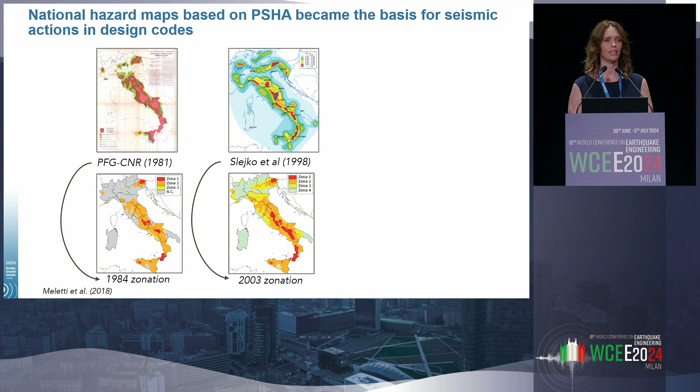Then in the late 90s, there was another working group that worked together to produce a probabilistic seismic hazard model. This did not actually ever find its way into a seismic design code, but it was included in this non-compulsory prescription after the 2002 Molise earthquake. And for the first time, there was a zonation map where every single place in Italy was considered to be a seismic zone. And so modern capacity design principles, ductile buildings, had to be designed everywhere in Italy.

And then we come to what's known as the MPS-04 model. So this is the seismic hazard model from 2004. At least 2004 was when the first results of that model were released, a PGA map with a 10% probability of exceedance in 50 years. And then over the subsequent years, a number of other outputs of that model were released, spectral ordinates for different return periods. And these were included after the L'Aquila earthquake, finally, into the seismic design code in 2009.

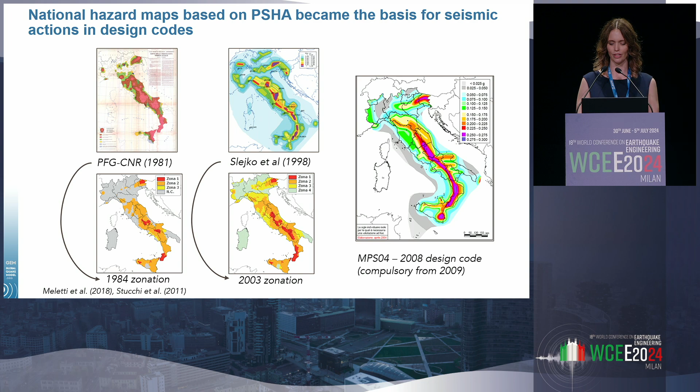Just to show you briefly how this MPS-04 model is used in the code. So we have a grid of points over the whole country. I think there's between 10 and 15,000 points. And at each point, a uniform hazard spectrum has been computed from the PSHA model for a number of return periods. And then what is found in the code is the PGA, a spectral amplification factor, and then a corner period. And those three factors have been defined by trying to best fit a spectral shape to the uniform hazard spectra. So they vary across the country and with return period.

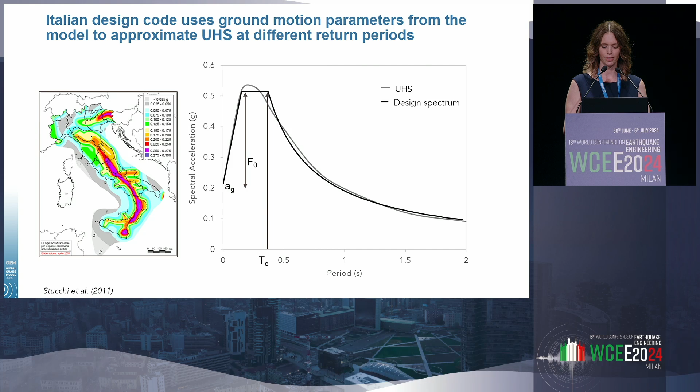So where are we today? It's been 20 years since the first results of MPS-04 were released. Well, we have had an update to the seismic hazard model in Italy since then. It's known as MPS-19. But unfortunately, this model has not yet been approved for adoption in the seismic design codes in Italy. And it's a long story, and I think there are people here that are probably much better placed to describe exactly why that isn't the case than me. But I did want to focus on one key aspect which I think has been a problem and from which we can learn in the future.

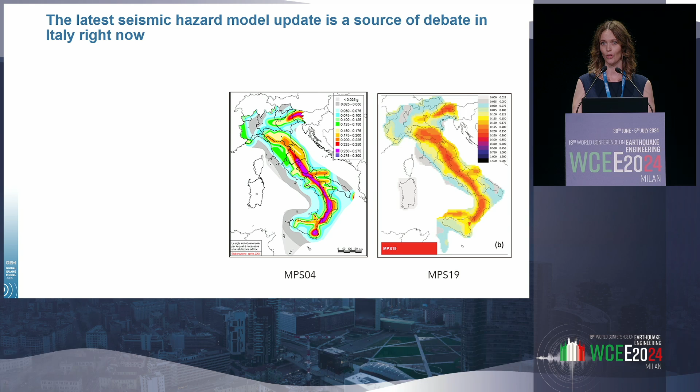So this model went through a number of reviews, international review panels, but there was one review in particular by the Civil Protection Department, which, when they were reviewing the model and seeing how much it had changed some of the values of PGA with the 475-year return period with respect to MPS-04, there was concern. And so there were requests to make some adaptations to the underlying PSHA model, to get, in their words, outcomes that were deemed more suitable for engineering applications. And so the PIs of that MPS-19 model, Marzocchi and Meletti, have responded with a paper in Seismological Research Letters, explaining that PSHA deals with what it is, not what we want it to be.

And so what they're trying to explain in that paper is that a PSHA model should be considered the best of the available science that we know today, earthquake science, and we should not be adapting that model to get the results that we want for our engineering applications. Now, they refer to this as the hazard risk separation principle, and that it's been violated because hazard modeling should be kept separate from then how that hazard model is going to be used for decision making.

I'm not a big fan of that term, the hazard risk separation principle, and I think you'll see from my presentation that I really want the hazard and the engineers and the risk communities to work closely together. But I do understand that we should not be changing the hazard models to get the results that we want.

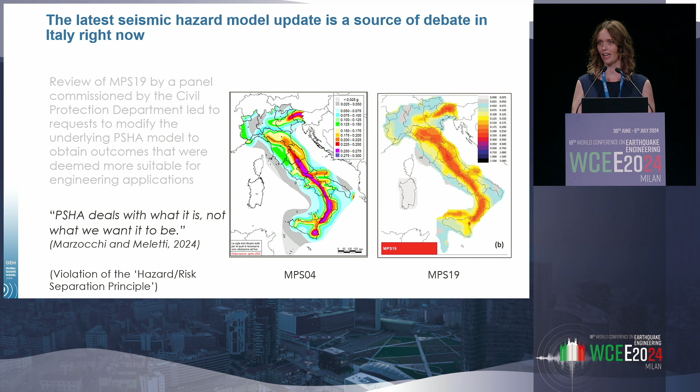One perhaps unfortunate outcome of this debate and this lack of approval of the model is that it's reignited a somewhat old debate in Italy on whether PSHA is actually an appropriate method to be used for defining our seismic actions in the code. And so this takes me on to this second part of the talk, where I want to talk about some of those criticisms which PSHA has received, especially from what's often known as the deterministic seismic hazard assessment community. These criticisms come from, therefore, other earthquake scientists, but also from the engineers and from media.

But let's look at some of the examples of criticism that you find when you read many of these papers, or also that comes through the media or from engineers. So we hear that earthquakes have occurred in a low hazard area. So this is an example of a paper, I've focused obviously on this example for Italy, where the authors, I don't think you can read the text at the bottom here, but they say here that these successive Italian hazard maps forecast some earthquake locations well and others poorly. So they have put the locations of earthquakes on the hazard map and have said, well, some of these locations are in low hazard areas, so that's a poor forecasting of the earthquakes.

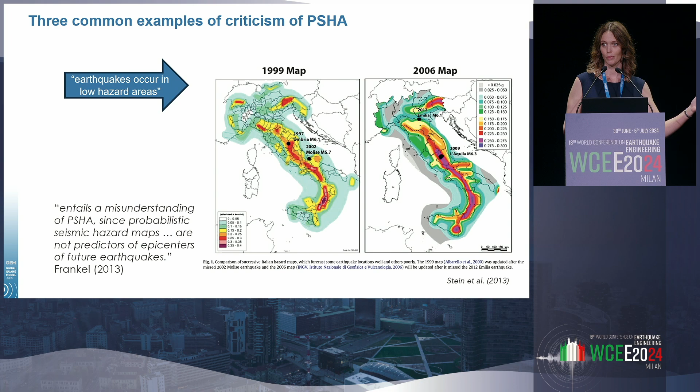Another thing that happens quite often is when the shaking is seen to exceed at some locations the spectrum, and then there's papers and comments that the code has somehow failed. So this is an example of a comparison of some response spectra from recordings in L'Aquila and how they compared with the code. And back at the time, myself and some colleagues, we tried to explain in papers why this was not a valid comparison and why you could not invalidate a uniform hazard spectrum just from single recordings.

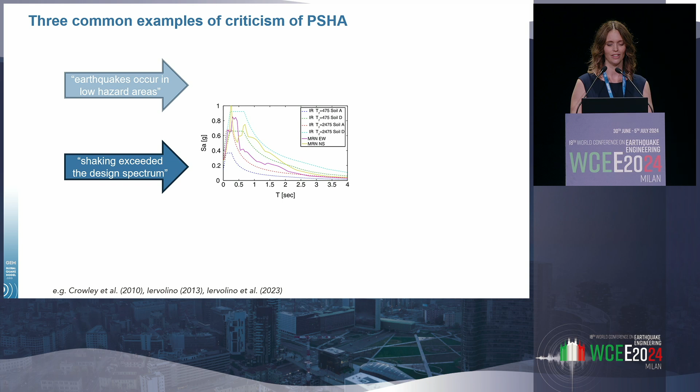Also, Julian has also published, I put the links there, a number of papers to really try and explain very well why we can't do this comparison, and then state that the code has somehow failed.

Apart from the fact that the UHS is an envelope of spectra, and so we're really comparing apples and pears. But remember that we said earlier that we have targeted a certain probability of exceedance, perhaps 10% probability of exceedance in 50 years. So we expect our uniform hazard spectra to be exceeded. The problem is if it's being exceeded too frequently.

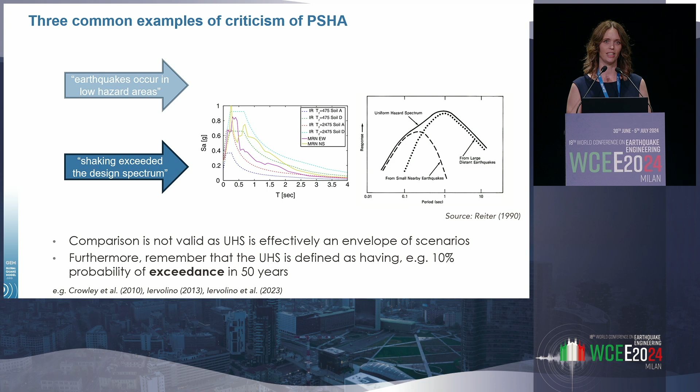And so in those papers that I cite there, there's a discussion of how we could start to evaluate the hazard maps. Now that we have a lot more ground motion recordings and data, we could start to see if we are exceeding more frequently than expected the uniform hazard spectra. But we certainly can't take a single event and a single location and start to criticize the spectra.

And finally, it's been also mentioned in the media, when a seemingly modern building has collapsed, that this is a sign that the hazard underlying the code has failed. And instead, as far as I'm aware, and when I'm giving this lecture, I'm inviting people to also give me examples if they exist, but as far as I'm aware, we don't have examples of modern, ductile buildings that have been designed with capacity design to the latest code that have collapsed due to earthquakes.

Those that have collapsed, for example, in Turkey last year, it's been shown to be due to deficiencies, either in not properly applying the code or in the way that the buildings were then constructed, not following the right practices. So we know that design codes allow us to have a lot of redundancy and conservatism in our design. As we heard earlier, we have capacity design. We make sure that our beams are failing before the columns in the buildings. We're going to stop these catastrophic failure mechanisms from occurring.

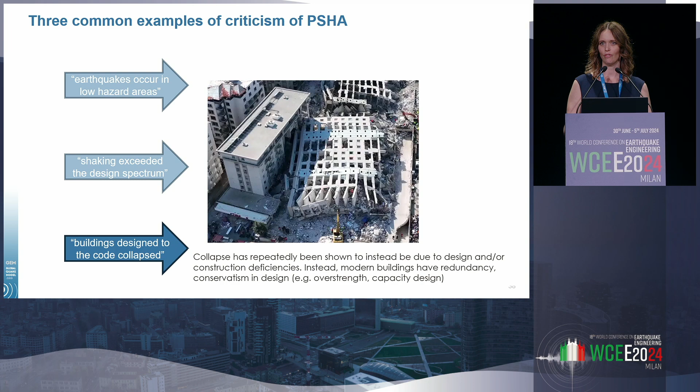And so seeing a modern building that has collapsed, as we can see here, we certainly cannot be then claiming that this is a failure of the PSHA model underlying the code. But while I was preparing the presentation, I was thinking, well, is there a reason that perhaps engineers could criticize a bit the PSHA community? And maybe the fact that hazard estimates do seem to have increased over time can certainly cause headaches for engineers who have to account for this adaptation in seismic actions.

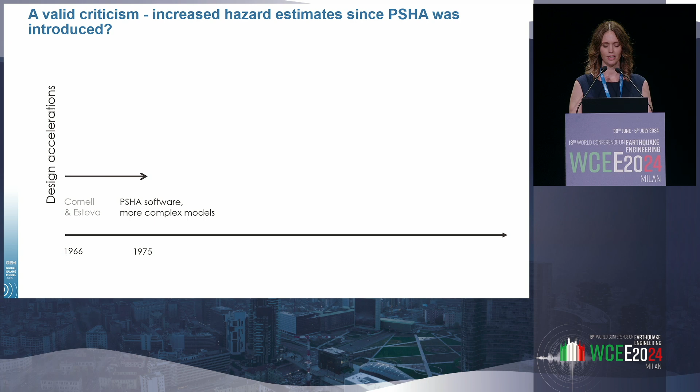So if we go back to the early years of PSHA, I think probably we were not seeing so many big changes in the outcomes of the PSHA analyses. But as is well described in this paper by Bommer and Abrahamson, around the 90s, you did start to see an upward shift in the outputs of our hazard analyses. And this was because it became much more standard practice to include the sigma, the aleatory variability, in the ground motion model. And I don't have an image here, but you can imagine a hazard curve. What the sigma will do is that it will lead to larger values of ground shaking at larger return periods.

What then happened over time is that we continued to collect more and more data. Somewhat paradoxically, this then led to an increase in the sigma in those ground motion models. You would imagine that it would decrease with more data, but it turned out that those early ground motion models, because they were based on limited data sets, were really undersampling this scatter in the residuals.

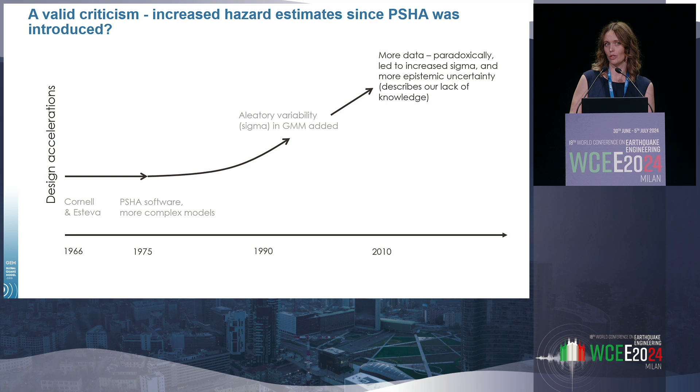Instead, when this study was repeated over 20 years later, with a lot more data that became available, the modelers realized with that additional data, they didn't actually know as much as they thought they'd known. And so they increased much more their epistemic uncertainty. Now, the impact of that increased epistemic uncertainty doesn't change so much the median.

So I've been asking myself and asking colleagues, and I asked this when I presented the lecture, what might we expect going forward? I would like to think that with more data, we could actually reduce the epistemic uncertainty, but a lot of seismic hazard modelers have told me that no, you can expect the epistemic uncertainty to continue to increase. We still haven't really got to the place where we have a stable handle of all the different sources of epistemic uncertainty and how we're modeling them.

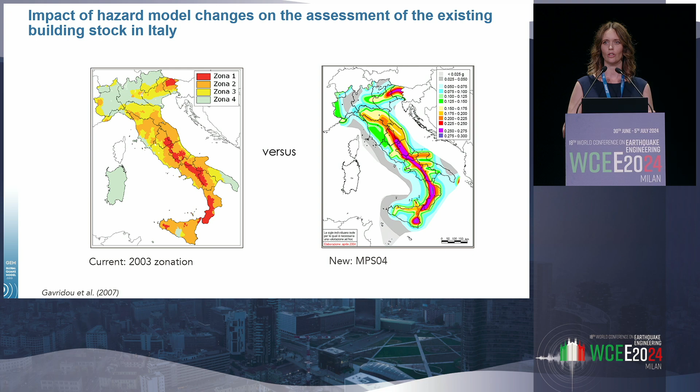So back in 2007, whilst the Italian MPS-04 hazard model was being developed, we had those first results in 2004, but then more and more uniform hazard spectra were being developed. We wanted to look at what the impact of that new model could be to the assessment of existing building stock in Italy. So we were comparing the practice of applying just those 4 different zones, each with a different PGA value and a fixed spectral shape, with introducing the MPS-04 code, which had a much higher grid of values and where the uniform hazard spectrum changed with return period.

So we took a number of reinforced concrete buildings, we applied the code, we applied a nonlinear static procedure, and we placed those buildings across the country, and we saw how many of them would be non-compliant. We brought in also the census data to look at the number of reinforced concrete buildings across the country. So based on that 2003 simple zonation, we were estimating around 40% of the reinforced concrete buildings would not be compliant. Instead, with the MPS-04 model, this reduced significantly to around 16% of buildings being non-compliant.

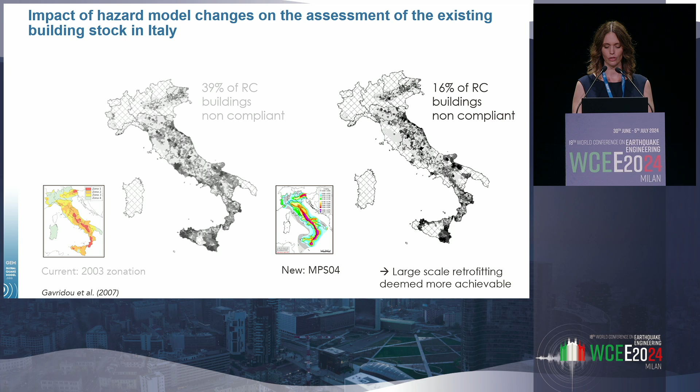And this was an interesting conclusion because it seemed to suggest that large-scale retrofitting would be much more achievable should this new hazard model be introduced. And a lot of buildings have been retrofitted since then. There's also been a lot of buildings that have been designed to that code, to that MPS-04 seismic hazard.

And I think that potentially the review panel I mentioned earlier, they might have worried about what would be the implications of now introducing the MPS-19, given that we've only just designed or retrofitted buildings to MPS-04. And what we've done is tried to look at what the implications of that would be within a risk space. So we assumed that all of our buildings have been designed or retrofitted with the MPS-04 hazard model. Then we produced models of designs for those buildings.

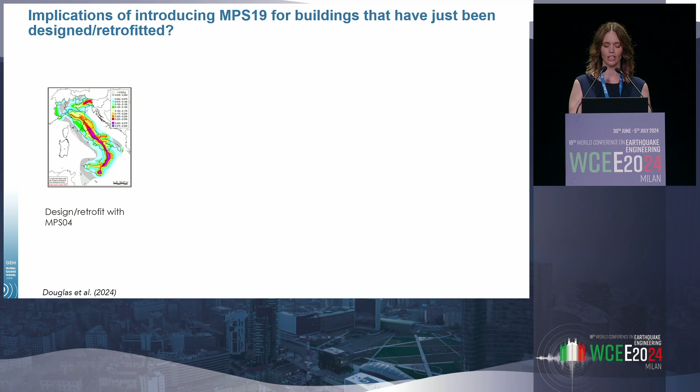So I'm not saying that this is what the outcome should be, but one of the outcomes you could take from this is that you could continue to design to MPS-04 because it implies an acceptable risk still. So should we change the seismic actions? And I think what I'm trying to say is that you need to do these types of analyses. You need to look at it within the risk outputs to really make those decisions. And you can't just look at the hazard results and criticize the hazard and try and change the hazard model.

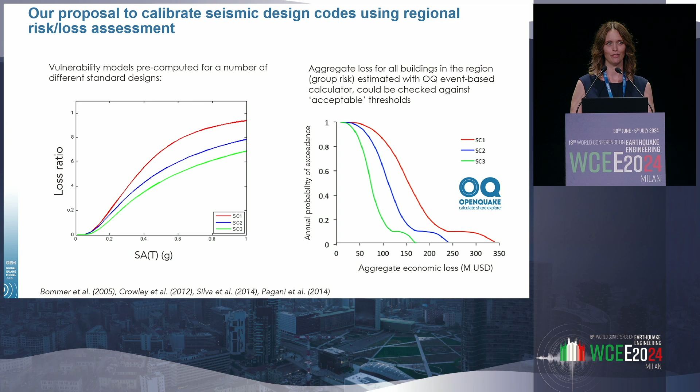They were leading to losses that were unacceptable. But I think we realized quite quickly that this was probably too extreme, probably too radical to completely remove seismic hazard from the code. And when I went to USGS around that time, I spoke to Nico Luco in his office, and he was telling me about what they were doing in the US. And that was, I felt, much more practical.

Whilst they were not considering the group risk, the impact to all buildings in a region, and they were still considering buildings as individuals, they had a much more practical way to bring in risk into the calibration of the codes. And many of you will probably be familiar with the risk-targeted seismic design maps. So I have a few slides just to explain them, just in case those of you in the audience are not so familiar.

So the idea is that you have a single location, you've got your hazard curve from your PSHA model. Now at that location, I'm going to have a building that's going to be designed to the code, and it's going to have a certain fragility. And let me just put in a random fragility function, because I haven't yet designed my building. In the case here, this is a log normal distribution. It probably doesn't look like a log normal distribution. That's just because the y-axis on the right side is logarithmic. But that blue curve is really just a typical log normal fragility function.

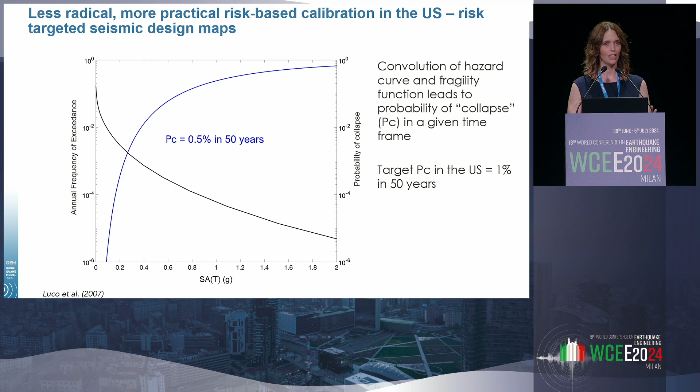So let me now combine that hazard curve and that fragility function and calculate the probability of collapse in a given time frame. So if I calculate in 50 years, for example, with this example building, I've found it's 0.5% in 50 years. In the US, they've decided that their target acceptable threshold is 1% in 50 years. So this building would potentially be too good. So I could make it more fragile, recalculate the probability of collapse. In this case, it's 2%. It's too high. Let's keep iterating until we hit our threshold, our 1% probability in 50 years.

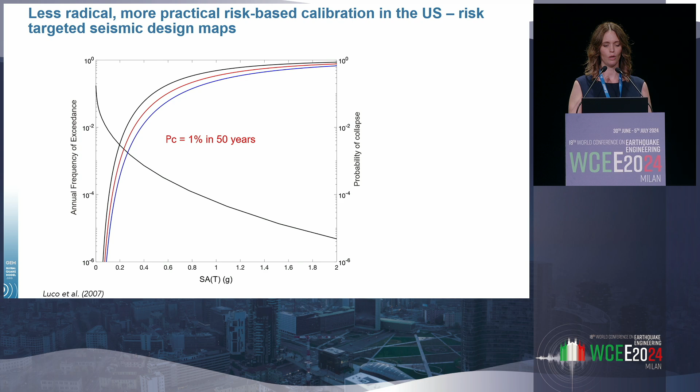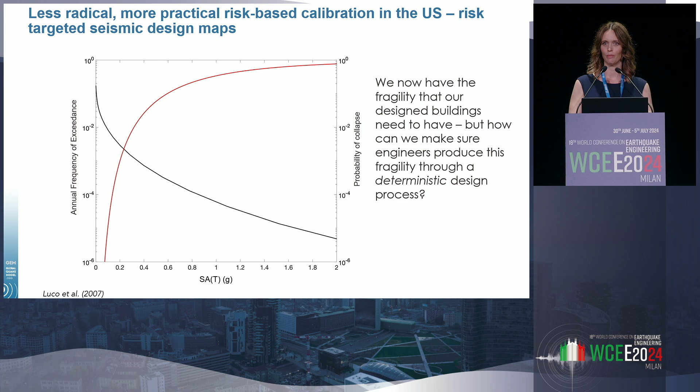So great, now I know the fragility functions that I want my engineer to design the building at that location to. The problem is we need to give them a deterministic process to do this. We don't expect engineers to be designing buildings and producing fragility functions.

So what they did in the US is that they designed a number of buildings to different levels of seismic design. And what they found is that under the design actions, the probability of collapse was at most 10%, so around 10% or lower. So what we can now do is we can come into our fragility function at 10% and get from that our design actions that we need to design our building to. And so in this, for example, we would have a risk-targeted hazard value that would be 0.6 g.

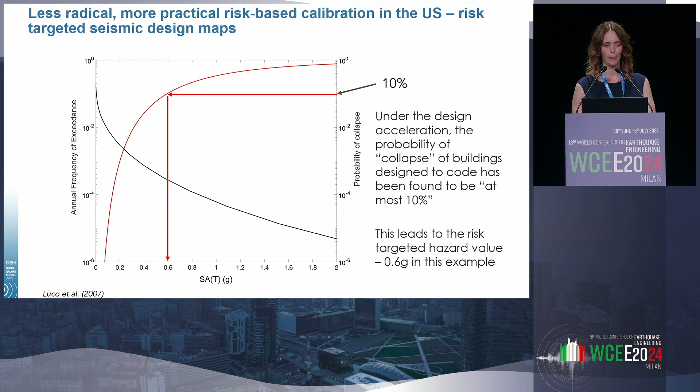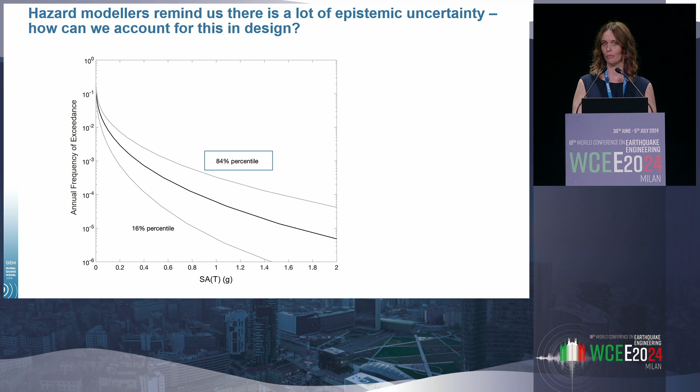So we could choose a certain percentile, and we could calculate a risk-targeted ground motion using that specific percentile. And so then we could almost target a uniform probability of exceeding our target probability of collapse, if you follow me. But this really requires a very stable modeling of the epistemic uncertainty, which, as I've heard, is not going to happen. So if we're expecting from version to version that our percentiles are going to vary even more than we're seeing our mean, I'm not sure that we should be using those percentiles specifically to target the seismic design.

And also, let's not forget that we have a lot of epistemic uncertainty in the fragility. When we've designed a building to code and calculate the fragility, there's a lot of epistemic uncertainty related to some of the assumptions we're taking, the model uncertainty, how we're modeling the building, and this is often ignored. We would also need to bring that into the process.

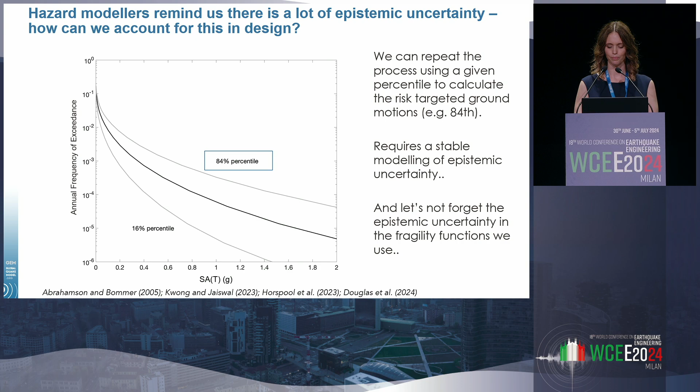So I'm just leaving that out there as a question of an area where we need to think about more. Coming back to after we'd heard about this risk-targeted approach in the US, we decided to look at how it would apply in Europe, and we realized that we had a lot of questions.

We tried different values of beta, that's the slope of the fragility function, and we also didn't know at the time what was the probability of collapse under the design ground accelerations for buildings designed to European codes. So we made a number of different assumptions and really did a sensitivity study.

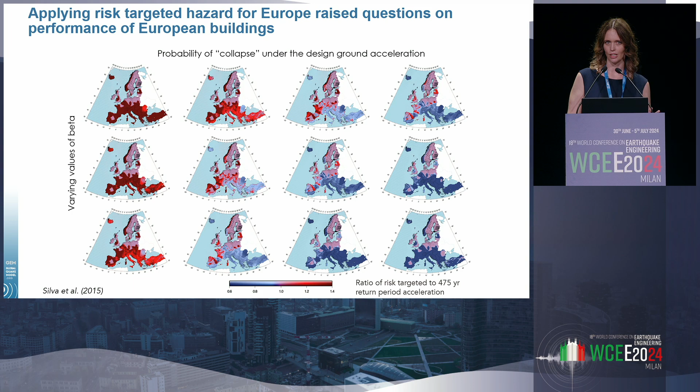So then some of my colleagues in Pavia and in Portugal started to look at this in more detail. So what is the collapse probability of European buildings under the design acceleration? They took some standard reinforced concrete frames again, and they designed them to different levels of design acceleration, from 0.05 G up to 0.4 G.

Then they produced fragility functions for those buildings from nonlinear dynamic analysis with selection of records. And they also changed the geometry and the material properties. So what you're seeing there is, for different levels of design acceleration, a range of fragility functions for those buildings designed to the Eurocode.

And then, because they are lognormal fragility functions, we can take the median value, so the 50% value, we can take the dispersion, and we can plot that and see how that varies with design acceleration. And so I think there were a couple of interesting features of this study that came out.

The first, as you can see there, is that up to a certain point, there isn't a change in the fragility function as we increase the design accelerations. In this case, it was up to 0.1 G. This is understandable if you think that at very low levels of seismic action, it's not actually the seismic action that is driving the design, but instead the wind loads, the gravity loads.

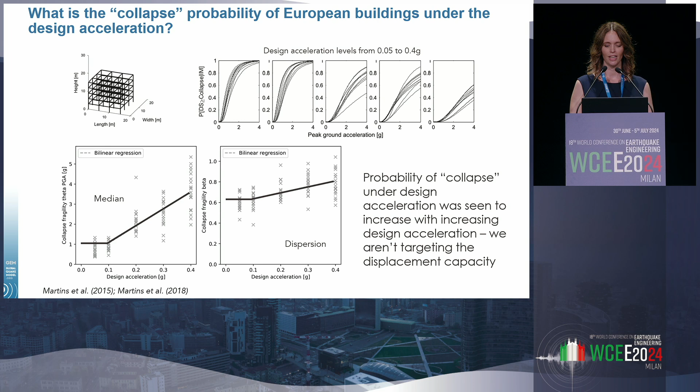So we decided to come back to the approach in Europe of doing risk-targeted hazard now that we had these models. And we also wanted to bring back in societal or group risk, because when an earthquake occurs, it doesn't just affect that one designed building, it's affecting communities of buildings. Many buildings are being impacted. How could we also limit the impact on the larger scale when we're calibrating our seismic design codes?

So we applied the risk-targeted process. In this example, it was Greece. We were using our collapse fragility functions for our designed buildings that we'd calculated for Europe. Then we calculated also vulnerability functions in terms of fatalities. And we placed reinforced concrete mid-rise buildings throughout the whole of Greece.

And based on the risk-targeted hazard, we immediately had a fragility function, we calculated the vulnerability, and we calculated the losses using that stochastic event-based approach that I mentioned before. And so we produced loss exceedance curves, not now for economic loss, but for fatalities. Here on the right, the dark bold line is the computed loss exceedance, or what's commonly termed the FN curve, that we'd calculated for buildings designed to code using a risk-targeted hazard approach.

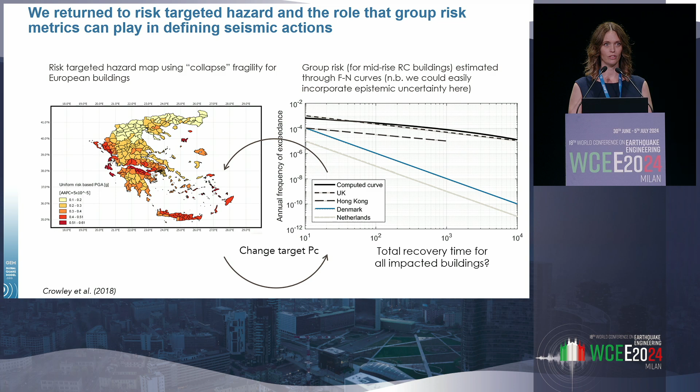So just to conclude, to bring together the different components that I've mentioned and some conclusions. I've talked about the use of national seismic hazard modeling and how it really needs to be within a seismic risk framework. To calculate the seismic risk at the national scale, both for individual and group risk, we need exposure models. We need models both of our existing building stock, but also where we expect to build in the future and what types of buildings we expect to build. We also need fragility functions for different limit states, not just collapse, and consequence models. And we can put this all together, as we've seen, to either target the seismic actions in the code or at least to evaluate the changes in seismic actions.

One thing I haven't spent too long talking about, but that I think would be beneficial, would be to have software to simulate design much more rapidly so that we can look at the effects of changes in the seismic hazard on the design. And there are a number of open source software and initiatives that are looking at putting together simulated seismic design software.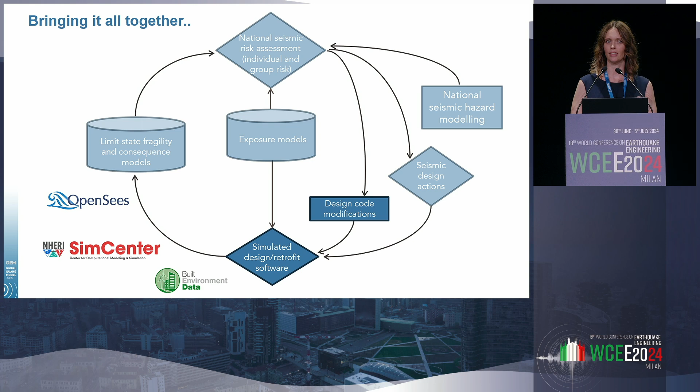Another thing that we shouldn't forget is that it's not just the hazard that changes from one version of the code to the other, but there are also changes taking place within the design code itself. And so by having simulation software, we can also look at the impact that those changes in the design code have on the risk. So it really needs to be all brought together so that we're evaluating both hazard and seismic design code changes and how that affects the risk.

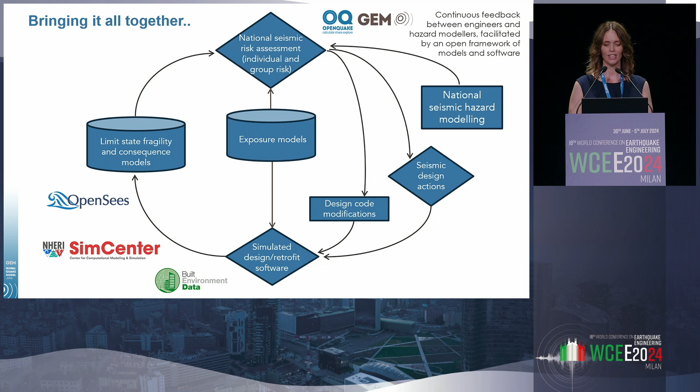And just putting on my GEM hat at the end here, we do develop a lot of open source models of hazard, of risk, and software, and I hope that we can facilitate what I think should be a very continuous feedback between engineers and hazard modelers on what the impacts of changes in the hazard on the risk are whilst the hazard models are being developed.

So just to conclude, I believe that the hazard science should be allowed to evolve. We should not make hazard modelers feel like their work is not worth the risk. They should be allowed to explore all of those advances in the science, and the hazard model should be allowed to evolve over time, but we should work together as hazard modelers and engineers to continually evaluate the impact of those changes on both the risk and the design at the national scale. And as I mentioned, I hope that open software and models can facilitate this.